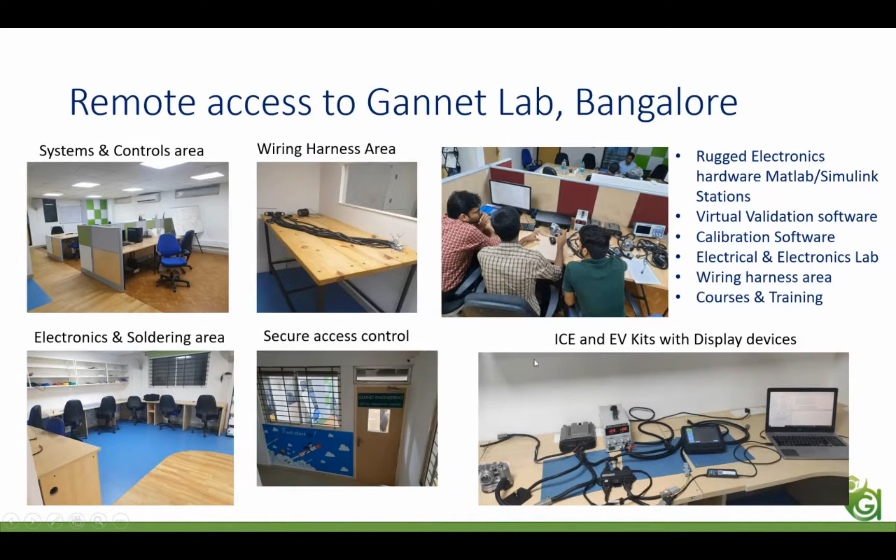This is just one of the EV kits and IC kits which we have. Coming to the list of different ECUs we have, this is just an example, but we have many more ECUs than this. These are the range of display units, and again these are not the only display units, we have a range of display units.

This is an example of what we showed earlier. This ECU is normally an 8-cylinder gasoline ECU, and this is a 7-inch touchscreen display unit.

Some of the courses come with remote access to the labs. What you saw earlier, the Gannet lab, you will have access to the development kits connected to those computers, which will have all the software needed to do your own development. So we see more traction from startups and students to learn hands-on on these real development kits using MATLAB and Raptor.

Once you connect to these computers in the remote lab, you can do your development and then flash the ECU and see how it works. Of course, Gannet will help you connect to the right hardware and make the wiring harnesses to connect to those systems.

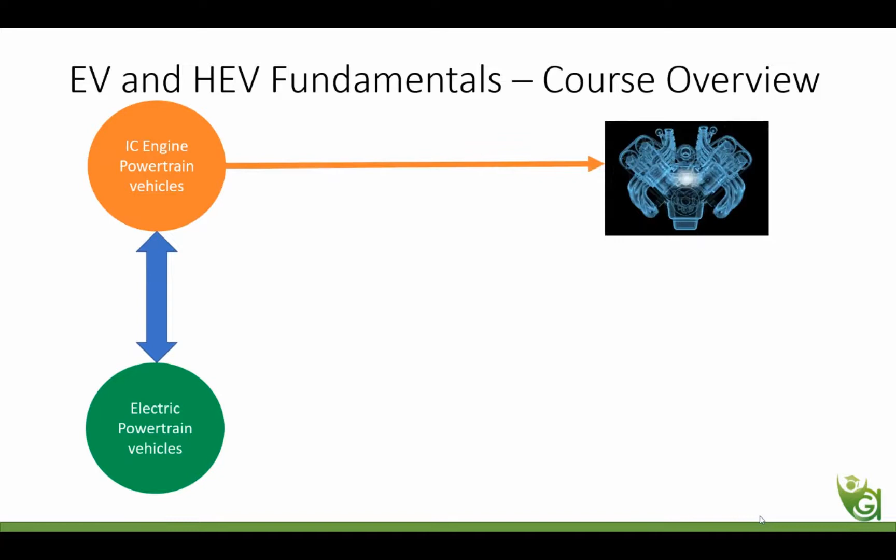Coming to the course overview part, this course focuses on IC engine powertrain vehicles which are converted to electric powertrain vehicles. So you have an IC engine vehicle and an electric motor, where the IC engine is being replaced by the electric motor, or the electric motor is augmenting the IC engine. Here we will understand the multiple configurations feasible for doing these options, either going for IC engine to EV or IC engine to HEV, and what different configurations are feasible.

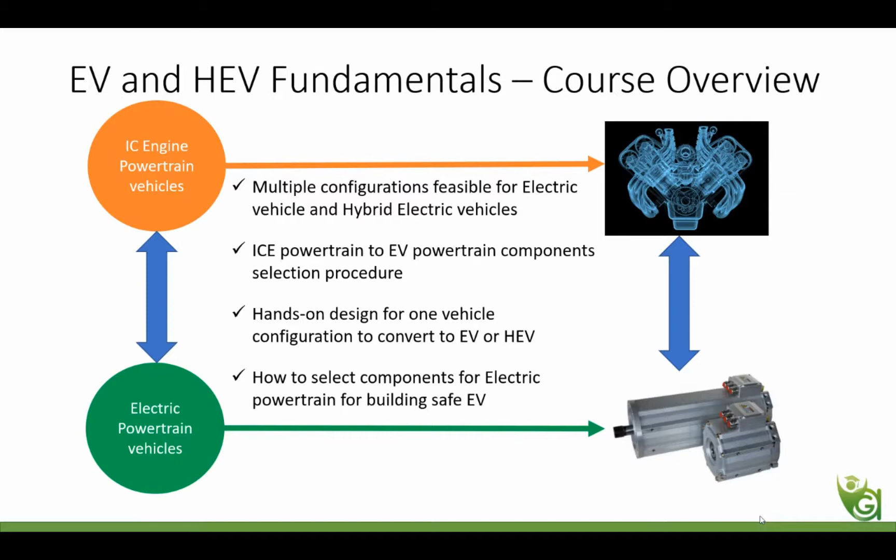Then the IC powertrain to EV powertrain component selection procedure. Before going to the component selection procedure, you will understand each component, why it is so important, and what factors to select it. Finally, you will have a hands-on design for one vehicle configuration, which can be a passenger car or heavy duty depending on the exercise. You will get the option to do one hands-on design for one vehicle configuration to convert to electric vehicle or hybrid electric vehicle, and understand how to select components for the EV powertrain to build a safe EV.

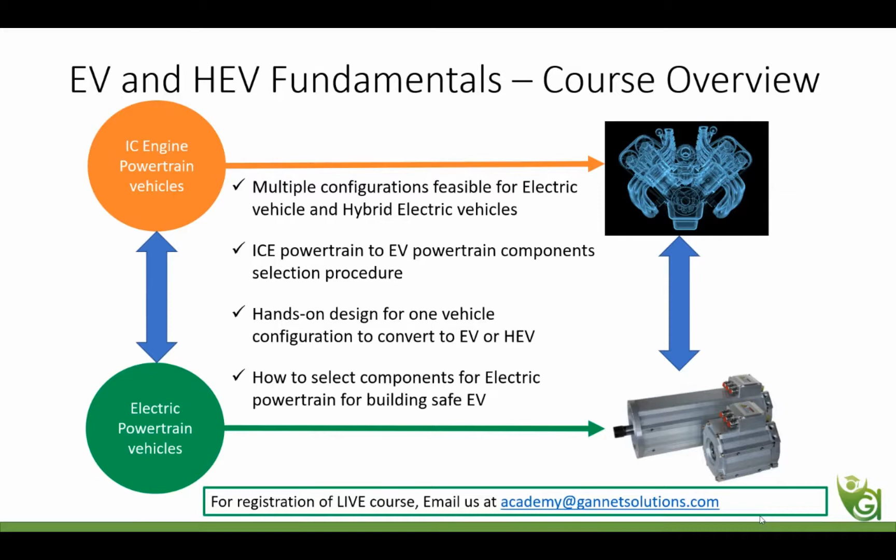This course is totally 10 hours, available in both self-paced and instructor live program. For the instructor live program, it's a weekday program with sessions from 7 to 9 p.m. Indian Standard Time. I'll also show you the schedule at the end.

Don't worry if someone is interested in self-paced courses. You might have a question about how to connect with the trainer or get your questions answered. For these things, you'll have an email connect with the trainer for questions. Anytime you can send me the email; as I am the trainer for these courses, you can send me the email directly, or to academy@gannecsolutions.com, and your questions will be answered. You will also have one monthly session for 1 hour where all your questions can be taken up and answered for self-paced courses.

To know about this particular course: this course is developed to help understand the basics of EV and HEV, as the current trend is towards electrification of IC engine powertrain to EV or HEV. This course provides a methodology to select the right layout and right components for electrification.

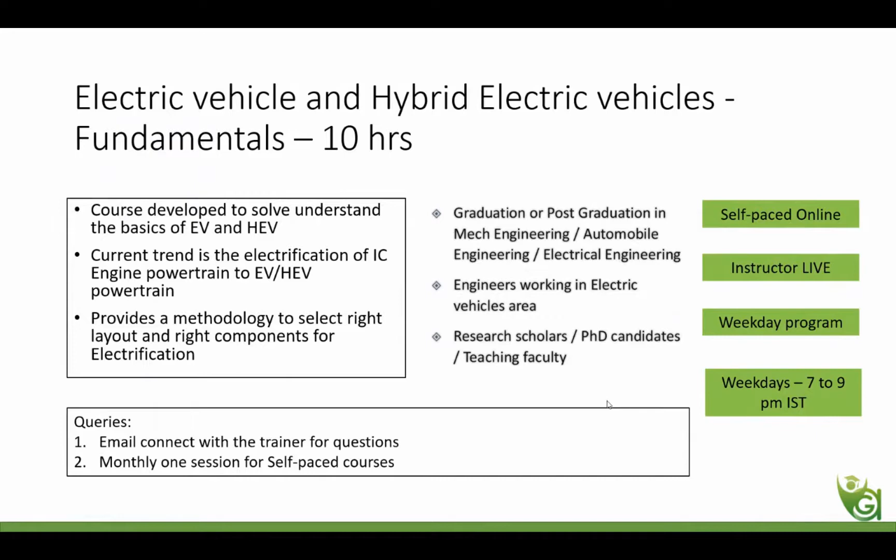So the students, as well as the people working in the electric areas, or the startups working in the electric areas, and the research scholars, the PhD candidates, teaching faculty, everyone, they are eligible for this particular course.

So let's go to the technical topic, which is electrification of IC engine vehicles.

Coming to the electrification of IC engine vehicles, first we need to understand what are the challenges that IC engines are facing today. So I request a poll now. Let's see what you feel are the IC engine challenges right now, which are mainly focusing on the move to electrification.

Thanks for the vote. So I can see 83% or 81% of people have voted saying emissions is the main problem, and fuel efficiency is the second option, which is 60%. And faster response is 30%, vehicle weight is 30%. So thanks for all your valuable votes. I can see emissions being a major factor.

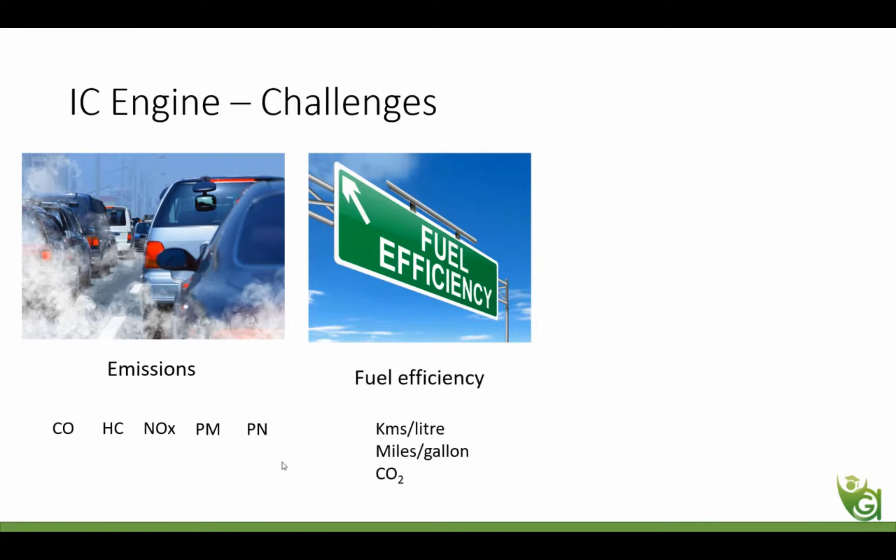The second challenge which IC engines are facing today is fuel efficiency, which is measured in terms of kilometers per liter or miles per gallon or CO2 norms. And the third challenge right now IC engines are facing is response, which is measured in terms of achieving faster speeds in less time.

Coming to the options we talked about, what are the IC engine challenges where electric motors are taking advantages? I see all these three are the important factors where IC engines are having bigger challenges and electric motors are taking more advantage.

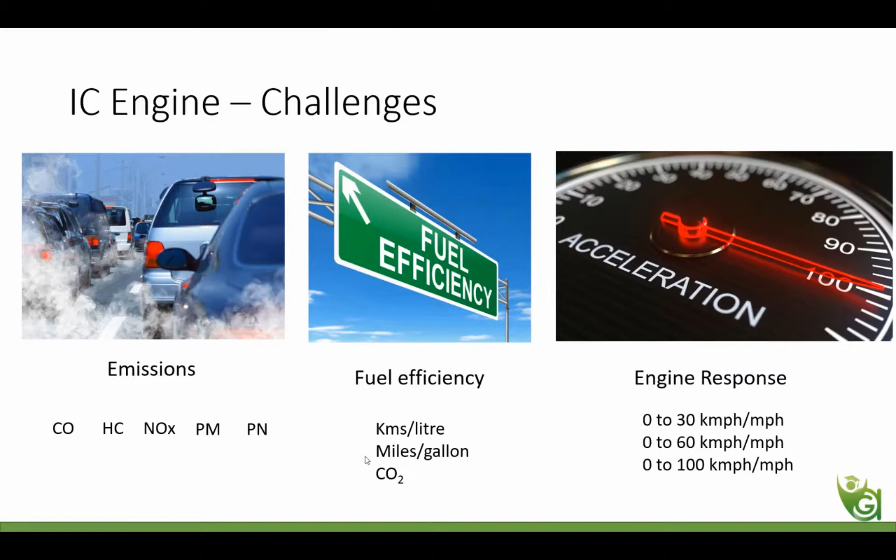So coming to this, we just need to understand a little bit more about IC engine combustion, because when we are trying to go from IC engine vehicles to EV or HEV vehicles, we also need to understand what we are trying to replace or append to the complete system. So for this, we need to understand what is IC engine combustion.

An IC engine is a system where fuel mixes with oxygen and produces high temperature and high pressure. And these high pressure gases' energy pushes the mechanical components, producing mechanical power from the IC engine.

Ideally, the fuel and oxygen in the air have to mix with each other in the IC engine combustion chamber, and it has to produce high pressure, high temperature, and CO2 and H2O. It was not supposed to produce all the other emissions which we talked about - that's the ideal scenario. But in the real scenario, it's producing other than CO2 and H2O, which are hydrocarbons, CO, NOx, PM, and PN.

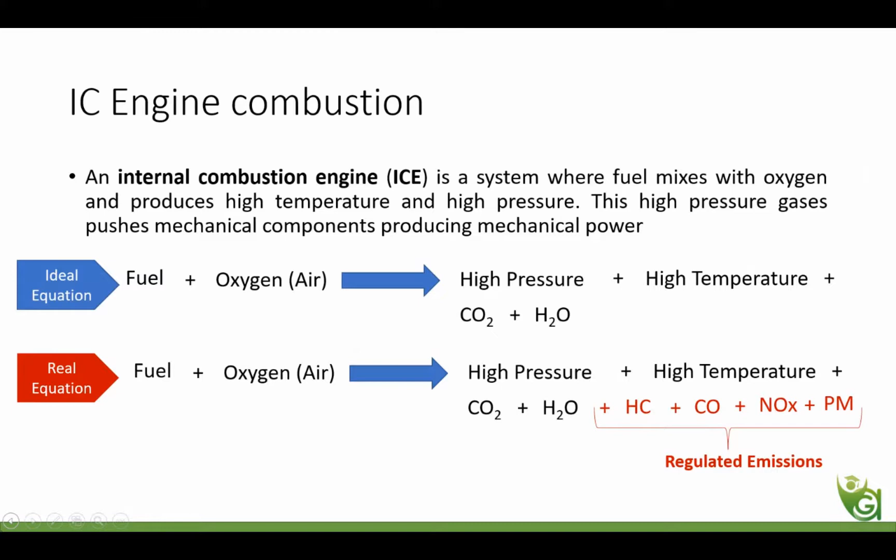Out of these particular emissions, currently these are the regulated emissions. That's the reason why I am putting only these particular emissions here, but there are many unregulated emissions. So this process of producing mechanical power from fuel is called combustion. Whatever emissions we're talking about, it's the combustion emissions which we are trying to focus on - these are the regulated emissions and there are many unregulated emissions.

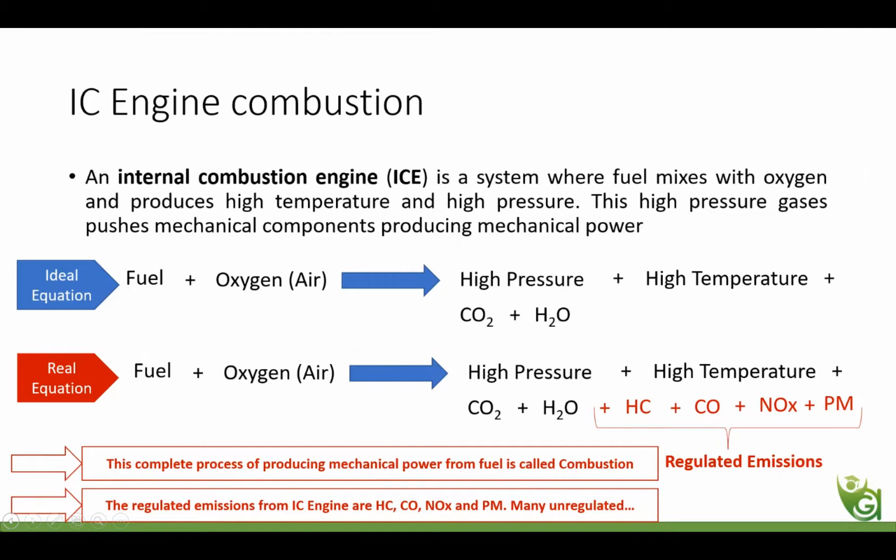Now, when we are planning to shift from ICE to EV or HEV, assume the first case like you are trying to move from ICE to electric vehicles. Now we are going to replace this IC engine in the vehicle and incorporate an electric motor. When we try to do that, what are the different aspects that need to be taken care of from a vehicle performance point of view? So we need to understand what the IC engine is right now providing.

So we'll discuss IC engine power and torque. When we hear IC engine specifications, the power and torque are the two things always highlighted. So what is power and what is torque?

Have a look at these pictures and it will clarify your questions easily. So power can be represented by a horse, and torque is represented by an elephant. So when you need more power - more power is needed to pull loads, at running condition, to move fast.

Assume you're already driving at 100 kmph. If you want to drive faster, then you need more power. More torque is needed to pull loads from static condition to low speeds. So assume you have a bunch of load to carry and move instantly, then you need more torque. Assume you are driving uphill, your car doesn't need more power, but it needs more torque to move at low speeds. So power and torque are very important for defining vehicle performance.

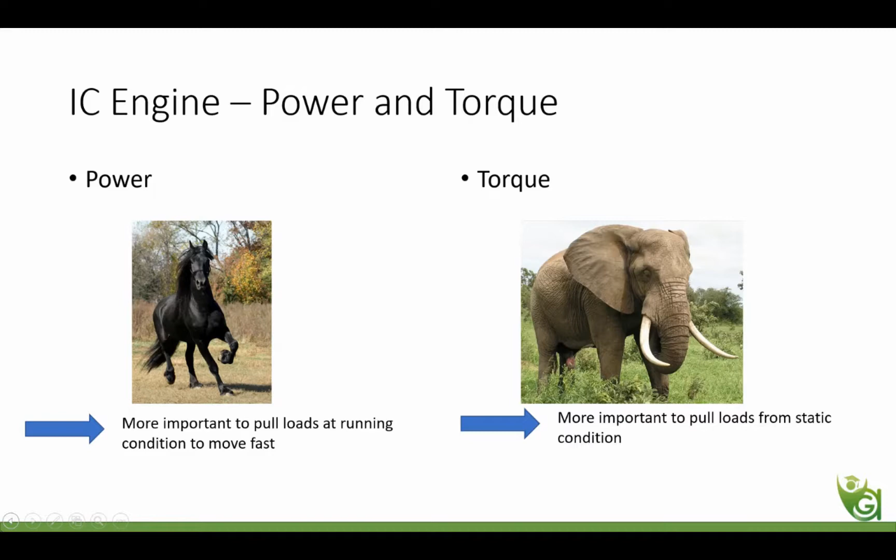Now we will see how performance curves of an engine look with respect to engine power and engine torque. As I mentioned, while we are trying to replace this IC engine with an electric vehicle, what kind of performance are we going to put into the vehicle? For that reason, we need to understand what power and torque are, how the power curves for an IC engine look, and how we have to look at the EV part as well.

Coming to the IC engine power curves, as I mentioned, power and torque are very important for defining vehicle performance. Have a look at this sample performance curve, which is for one diesel engine, having a maximum torque of 450 Newton meter. Here the primary axis is engine speed, the secondary axis is torque, and the other secondary axis is power. The blue line indicates torque, and the red line indicates power. This is how typical performance curves look.

This particular engine shows a flat maximum torque from say 1600 rpm to 2400 rpm. It can look like a single top curve, like a bell curve. You need to understand what this power curve means. You can see this is the maximum power point of this engine, and this is the maximum torque. At low speeds, this torque curve is the important factor which helps you take more load, and this is the particular factor which helps you achieve more speed.

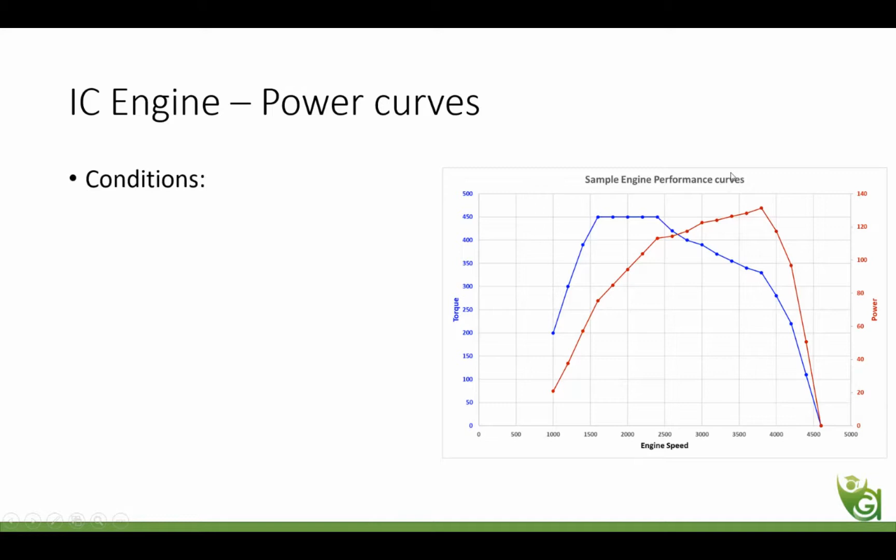So when we look at different conditions, at gradient conditions for all vehicles, you need more torque. If you are trying to operate that particular vehicle most of the time in gradient conditions, then the vehicle which we are going to convert to EV should provide more torque than more power.

Coming to heavy duty and off-highway vehicles, more torque is preferred because heavy duty vehicles carry more load. Take an example of a bus - it carries more people and load, and it has to move up the hill. It's too much load and it has to move up the gradient, so it needs more torque than it needs more speed.

Even for off-highway vehicles like a road roller or construction equipment, they work at only one point, pulling more load and doing things, so you need more torque for those kinds of applications. For on-highway vehicles, like I talked about, even a bus needs both because it has to work in both conditions - on the highway as well as in the gradient.

Coming to idle speed - this is what the terms you need to understand from the IC engine, and then when you're trying to understand the electric vehicle, electric motor. Since you're going to substitute this with the IC engine, you need to understand the different terms and terminologies of the IC engine. The other one is idle speed - idle speed is the engine speed at which the power is zero.

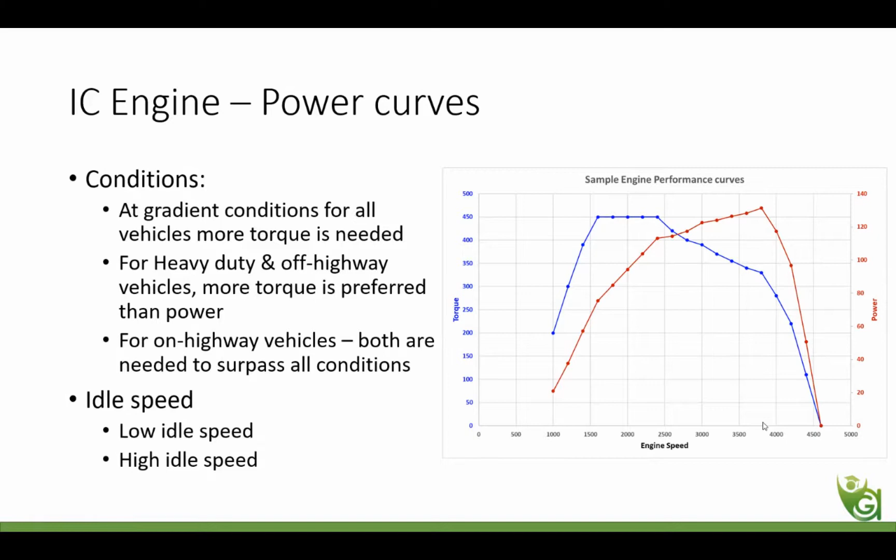In a normal IC engine vehicle, output power or torque are measured at the flywheel of the engine. This is the engine and the flywheel connected to it. The power and torque are measured with respect to the performance curves we talked about earlier, coming at the end of the flywheel. Then most engines are connected to transmissions with a number of gears, which connect to the drive shaft, then to a rear or front axle, and finally to the wheels. So this is the normal power distribution, how it happens.

This is the power at the engine, then it will transfer to all the wheels.

Now take an example of a car. Which wheels are provided power in a passenger car? Which wheels of the vehicle will be provided power in a four-wheeler?

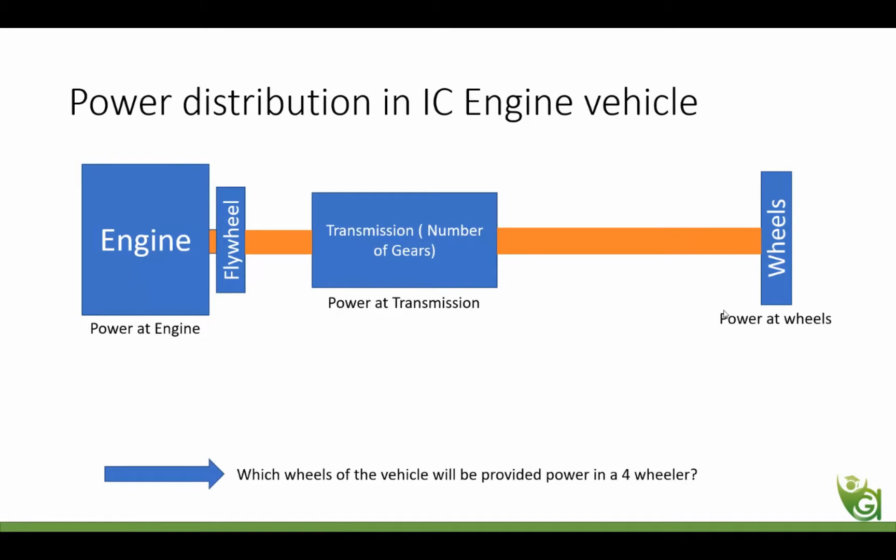If you look at many rear wheel drive vehicles, mostly SUVs and higher power vehicles will have rear wheel drive. Most passenger cars you see will mostly have front wheel drive configurations. So all passenger cars are mostly front wheel drive, and most SUVs, buses, everything will be rear wheel drive. But there are also some vehicles with the option to connect two wheel drive or four wheel drive. Two wheel drive means either of those two options, rear wheel or front wheel, and all wheel drive means connected to all four wheels. All wheel drive vehicles are very much needed when those vehicles are moving more on gradient conditions.

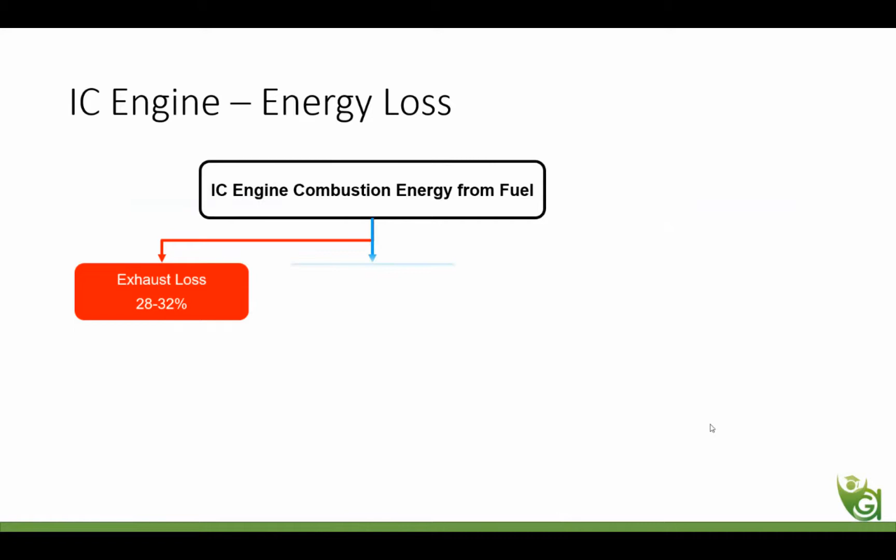Coming to the losses, the exhaust losses are close to 30% in an IC engine, and the coolant losses are again close to 30%. The remaining power is what we call indicated power, which is close to 40%. Out of this indicated power, the engine has to take care of its own systems like cooling and lubrication, and then take care of friction. Finally, the amount of power delivered to the wheels is close to 30%. With improvement of new technologies, this brake power can increase a little bit more, but it's not going to even reach 50% in the coming years. This is how the energy losses happen with IC engines, so the power delivered to the transmission is this brake power, which is 30%.

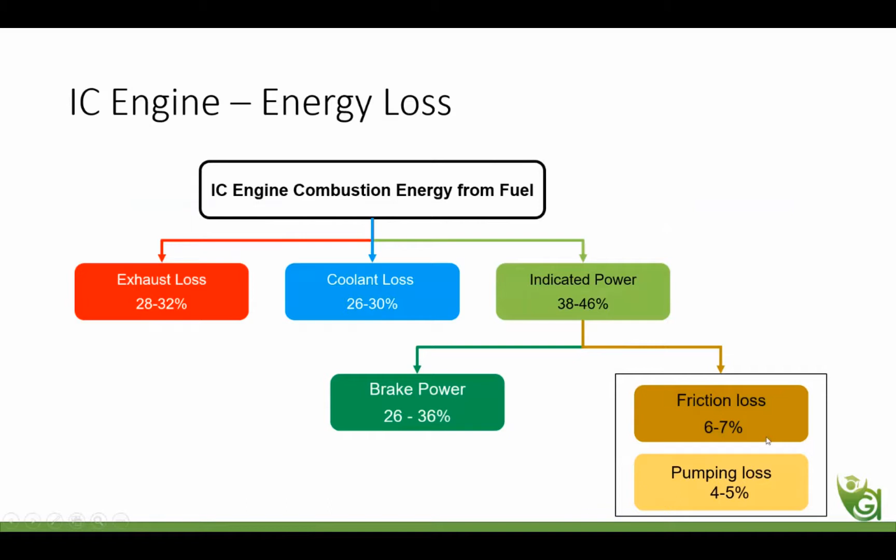So now coming to electric motor, as we said, we are going to replace the IC engine with motor, right? Let's see the electric motor performance curves, as well as what are the losses in electric motor. Is it the right thing to replace it or not?

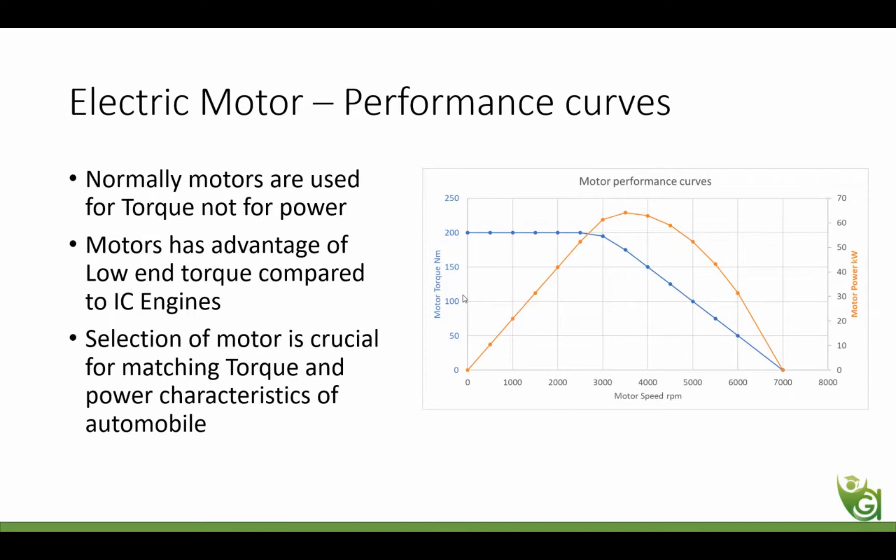So now coming to energy losses of electric motors. The losses on electric motor are more focused on spinning losses and thermal losses. Spinning losses also include iron losses and copper losses. Then you have thermal losses, and finally the brake power which we are going to provide to the particular transmission. Assume the same IC engine vehicle is replaced by electric motor.

So it is connected to the transmission and to the wheels. You're going to have 90 to 95% of power - say 90% is what you're trying to get through electric motors. When we compare, this makes it more helpful to see, yeah, there are less losses in electric motor.

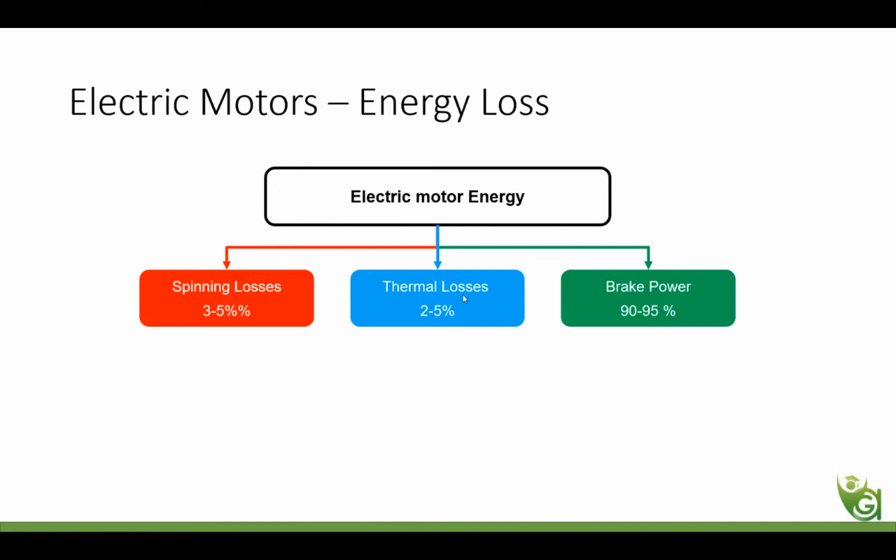But again, electric motor needs electric power, which has to be derived from some other source. So here I'm not talking about the losses incurred for generating the electric energy and using the electric energy. Here I'm talking about electric motor using the electric energy and providing the power.

So the brake power is what we are trying to get from this particular electric motor to the rest of the powertrain. In this case, when we're trying to connect it to transmission, this 90 to 95% is what the transmissions are going to receive.

So from this comparison, it is very evident that the energy efficiency from IC engine is very low compared to the energy efficiency of electric motor. So for providing the same amount of power and torque, the electric motors are very compact. You don't need a higher same size of engine, but a more compact electric motor to replace this particular IC engine.

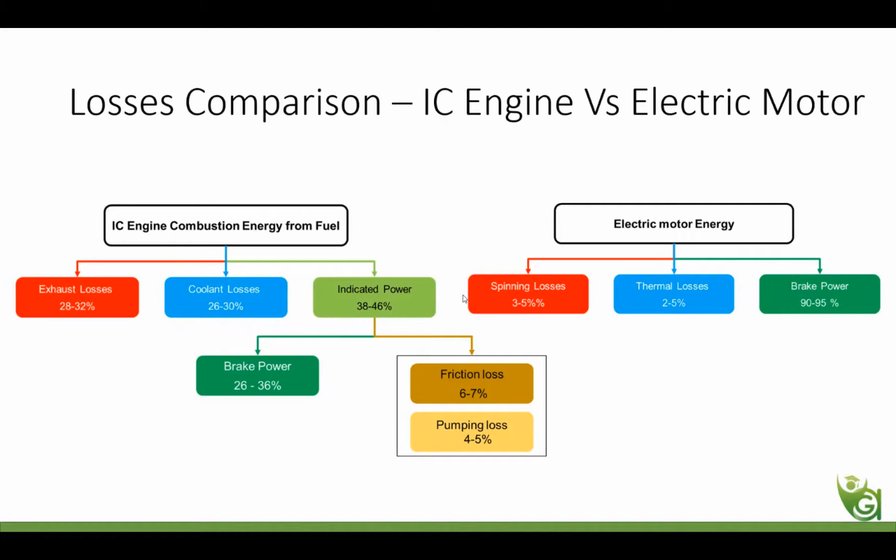So let's have a look at the power distribution also from electric powertrain. As you saw earlier, now we are going to replace that particular IC engine which is there in the layout with electric motor.

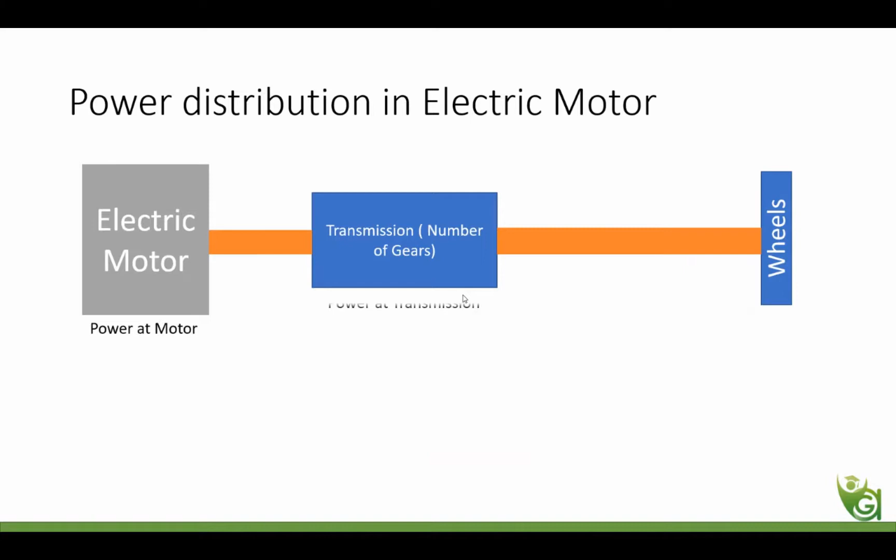So now again, same case - which wheel will be provided? It remains the same case like how you have it in earlier four-wheeler vehicles. It can be given to rear axle, front wheel axle, or all-wheel drive.

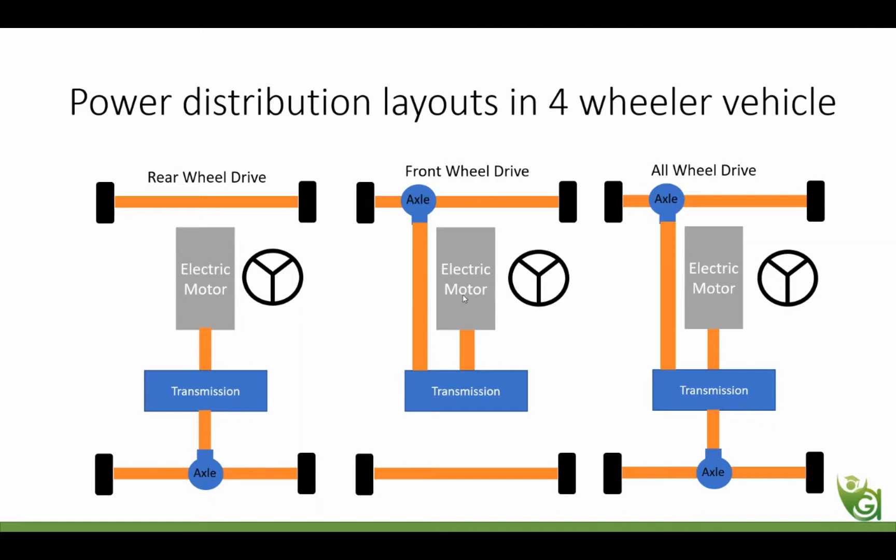Now, the replacement of IC engine with electric motor. So what are the things which electric motor has to match so that it can replace the IC engine easily? The first thing is electric motor speed range should be very similar to engine speed range, if you are not going to change many other things.

If you're just, as earlier you saw it, right? Transmission remains same, wheels remain same, everything remains same. You are changing only electric motor - you're just putting electric motor in place of IC engine. Then the speed range also should match, and the motor torque and power should be matching to the similar engine torque at those particular speeds. Then it's like a like-to-like replacement.

Getting a like-to-like replacement is really going to take a lot of time in selecting the right motor. Many times you won't be having the option to have a right motor with a similar speed range, torque range, and power range. So now let's have a look at some real examples of IC engine vehicle and electric motors.

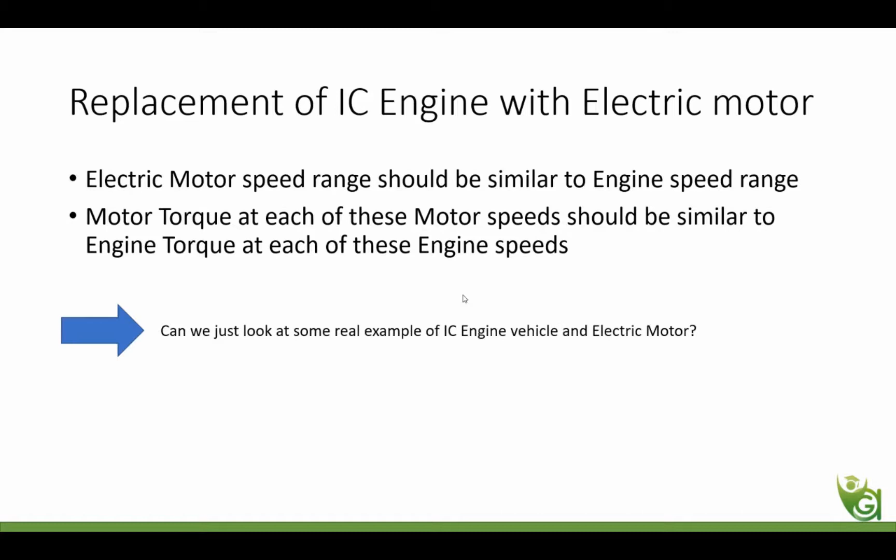So let's take an IC engine gasoline car. I'm just taking a Honda City as an example, because I just want to take an option which has both gasoline engine and diesel engine. Till now we talked about IC engine - we didn't mention what kind of engine, right? We talked about only IC engine. I'll come to the point why I'm talking about a different fuel type of IC engine.

So let's say one car is powered with gasoline fuel, and this particular vehicle has performance specifications like the weight - it has curb weight, which is 1107 to 1153 kgs. It depends upon the accessories and other things.

The dimensions of the vehicle remain the same with respect to gasoline and diesel. The maximum speed of this particular vehicle is 170 to 180 kmph. And the acceleration time, so we talk about response, efficiency, emissions, right? 0 to 100 kmph is the response here, 10.2 seconds. And the engine giving power and torque is a 1498 cc, 4-cylinder engine, giving close to 120 horsepower at this RPM and 145 Nm torque at 4300 RPM.

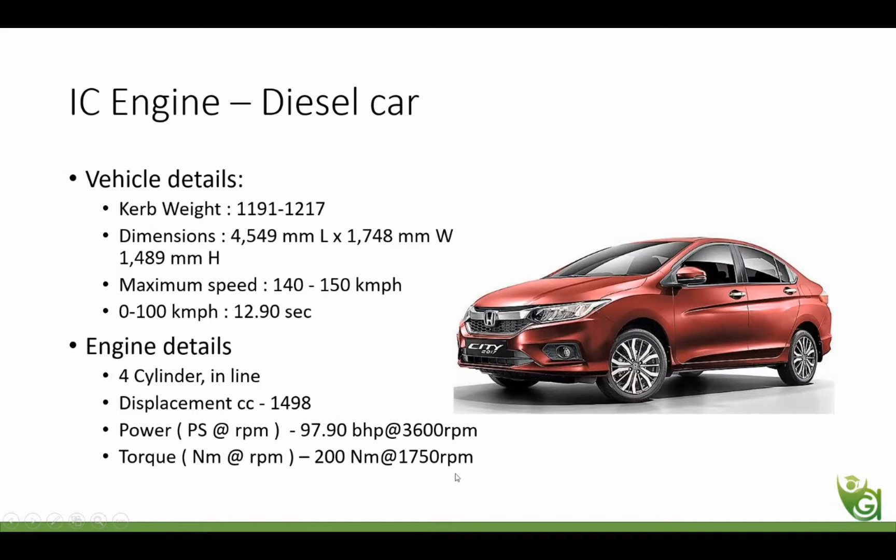Now, when we are trying to replace this particular car with an electric motor, how do we select the motor for this particular different IC engine combination? You want to match this speed range or this speed range, you want to match this torque or this torque, you want to achieve this particular speed at this particular speed. What are we trying to match? So how to select the right electric motor and transmission?

If you look at this particular vehicle, it has a manual transmission, automatic transmission also. Now, which engine and which transmission do I have to select for this particular vehicle? Earlier we talked about only engine to electric motor, but now in this condition, which one to choose? Do you want to match gasoline performance or diesel performance? Because when we have one EV for that particular car, it can replace both engines, so which performance specifications do we achieve when doing this exercise?

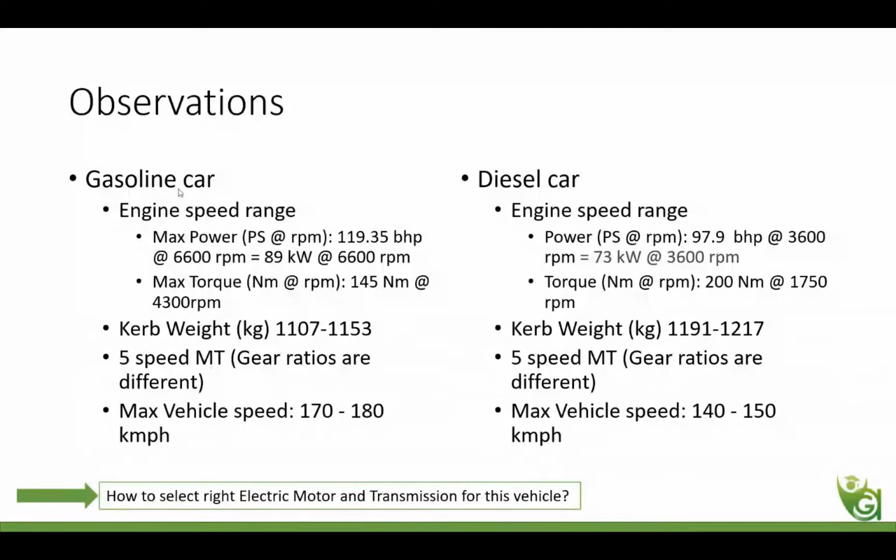So what did we learn till now? In IC engine powertrain, the engine plus transmission has to be replaced by EV powertrain, which is motor plus transmission. And the EV powertrain component selection is very crucial for achieving this vehicle performance.

I have a question here: can we have more than one powertrain in the vehicle? So assume when we're talking about powertrain, I mentioned about IC engine powertrain, which is engine plus transmission. So you have a diesel engine plus transmission, gas engine plus transmission. Can we have both together? Can we have more than one powertrain in the vehicle? So I request you to answer the poll: can we have more than one powertrain in the vehicle? Yes or no.

So, can we have more than one powertrain in the vehicle? I can see like 70% said yes, it is possible to have more than one powertrain, and 23% said it's not possible to have more than one powertrain.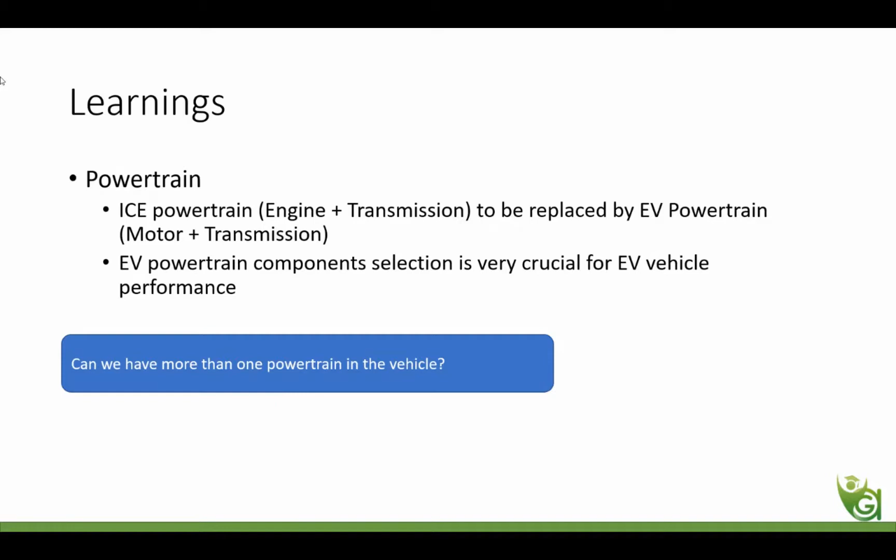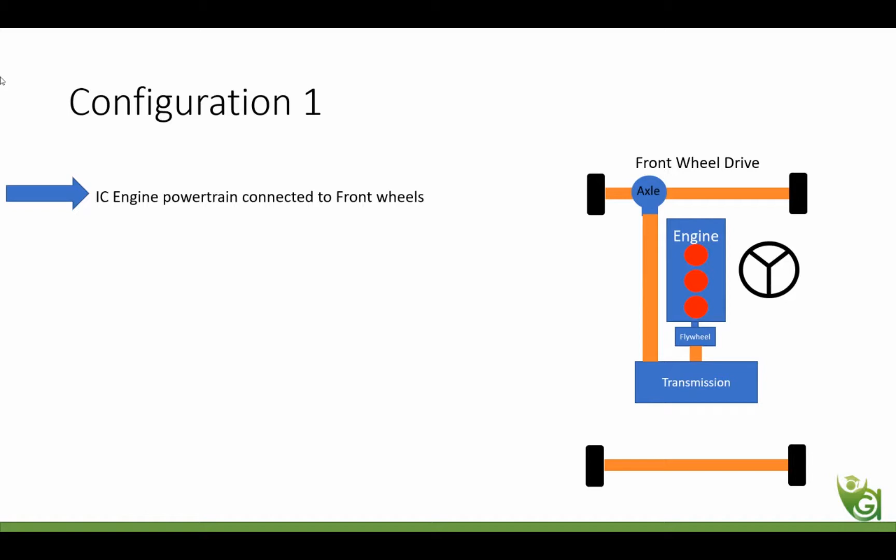I'll say yes, it's possible to have more than one powertrain, but let's look at a configuration where we'll have more than one powertrain. In this configuration, what we are seeing is a front wheel drive configuration, of course with an IC engine. So in this particular configuration, can we have rear wheels which are not powered as of now? Can we have the rear wheels connected to the electric powertrain? Can we add an electric motor and transmission to the rear wheel? Assume now we are going to have some different conditions of working.

Assume the IC engine is going to work in some conditions. Say whenever the vehicle needs more than 60 kmph, I want the IC engine to drive the wheels. Under 60 kmph, let the electric motor run it — I'm just taking an example. So can we have the rear wheels connected to an electric motor powertrain and work in different modes? So, can we have more than one powertrain in the vehicle? Yes, we can have.

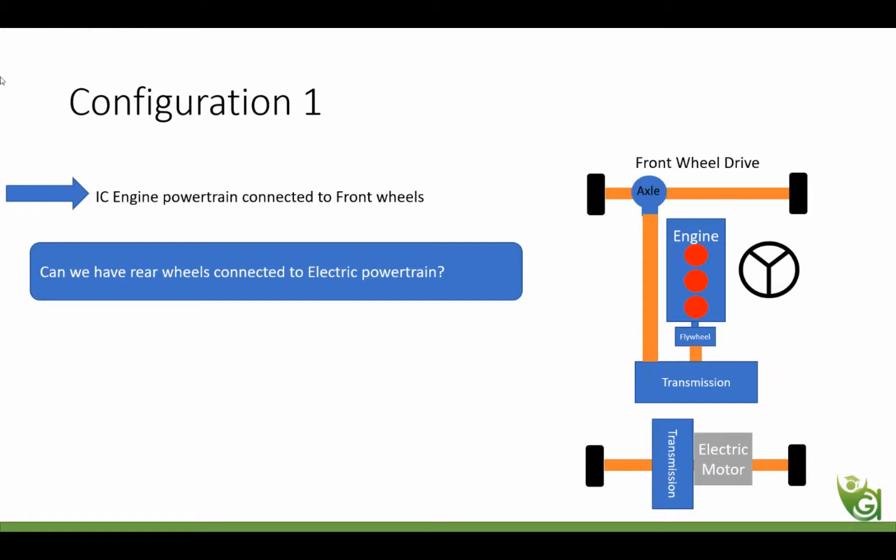So vehicles with multiple powertrains are normally called hybrid vehicles. It doesn't mean it needs to be only electric motor — you can have a gasoline engine powering the front wheels and a diesel engine powering the rear wheels. Hybrid vehicles means multiple powertrains are available in the vehicle layout, where different fuels are powering different parts. When we talk about an electric motor as one of the powertrains, we call it a hybrid electric vehicle. So in a vehicle with multiple powertrains, when one of them is an electric powertrain, they call it a hybrid electric vehicle. That's it, so if you take an option like yeah, I want, or you might have seen another option.

Many early vehicles, before electric motors took more and more market share, used LPG kits and CNG kits. Even in Delhi today, there are more CNG vehicles. So obviously when you have an LPG kit, assume this particular vehicle has an LPG kit, but the LPG kit is not going to power the wheels directly. This engine, which was there earlier, assume it's a gasoline engine.

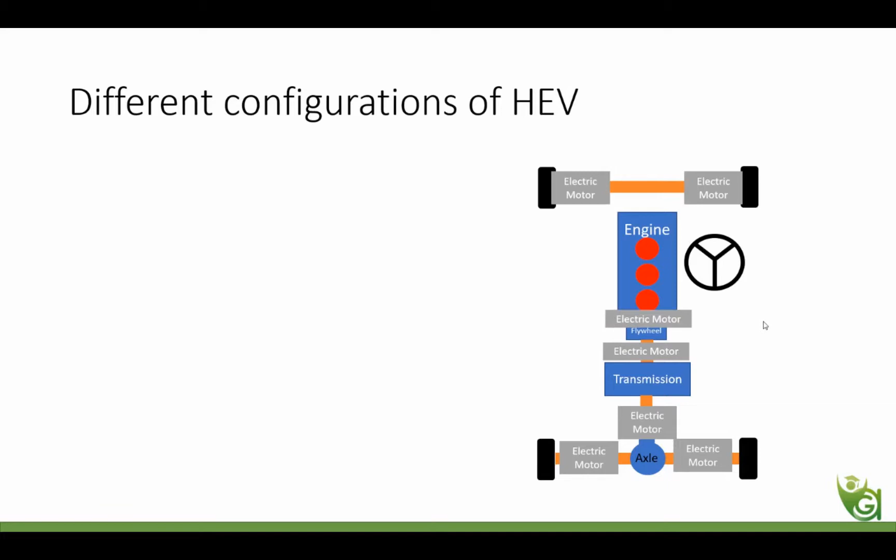Can I fit it between engine and transmission? Can I fit it between engine and the flywheel? Or can I fit it in the front end of the engine? Front end of the engine. So you can see all these options are feasible to install an electric motor now.

Okay, so technically when we talk about the motor installed at the front end accessories drive, we call it a FEAD belt. Front end accessories drive is called P0 configuration. So when you see any vehicle that says we have a P0 motor, you should understand that particular vehicle has an IC engine powering the wheels. It can be front wheel drive, rear wheel drive, or all wheel drive. And it also has an electric motor on the front end side of the engine.

If the motor is placed in between the IC engine and the flywheel, this configuration is called P1. If the motor is placed between the engine and transmission, it's called P2 configuration. Similarly, between transmission and axle, it's P3, and on the wheels, it's P4. Hope you understood now what is P0, P1, P2, P3, P4. It depends mostly on the location of the electric motor in the vehicle. So different HEV configurations we call P0, P1, P2, P3, P4.

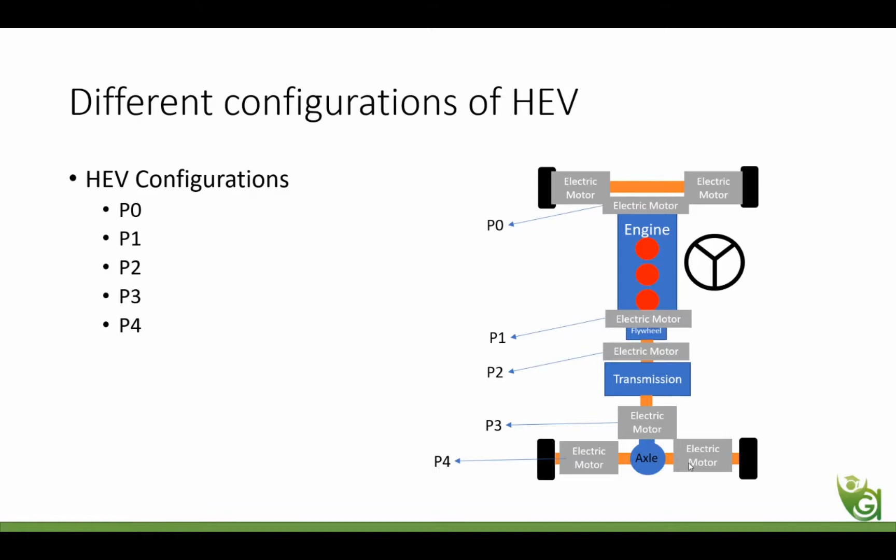Okay, I have a crazy question here. Can we have all the above configurations in a single vehicle? So if you count, let's see how many motors are here. 1, 2, 3, 4, 5, 6, 7, 8. 8 motors and 1 engine powering the wheels. So can we have all the above configurations in a single vehicle?

What do you think? So the possibility is yes, it is possible to fit all the motors in a single vehicle, but it's not economically viable. And now you have to control even the vehicle, deciding which motor or which engine in which condition is driving the wheels. It's possible, but economically it's not a viable option. Controlling this IC engine and motor together is going to be very, very complex. But as a research topic, it's always possible to explore different ways of controlling and working together.

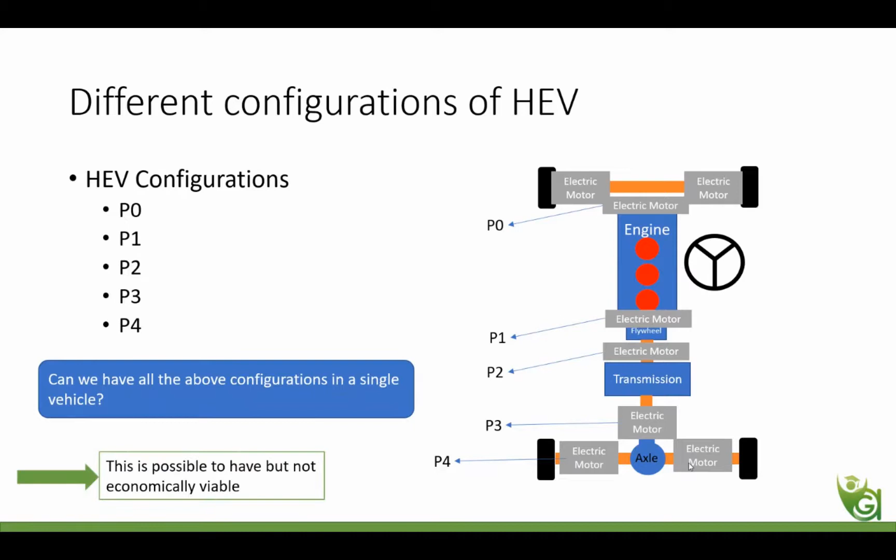So let's stop for some questions now. There is a question asking for examples of bi-fuel vehicles. I request that if anyone has questions, put them in the Q&A place, wherein I can answer your questions during the session, anytime. You can put the questions so that when I have a Q&A session, I'll answer all your questions.

Coming to the question about examples for bi-fuel vehicles, you can see these particular vehicles which are CNG fitted, LPG fitment from the manufacturer. Most of the vehicles right now are S-CNG fitted vehicles. So all these vehicles come as bi-fuel vehicles, wherein you can have the possibility of using petrol or CNG. Today in India many vehicles in production are available with a petrol plus CNG option, wherein you can use any of the fuel at any time.

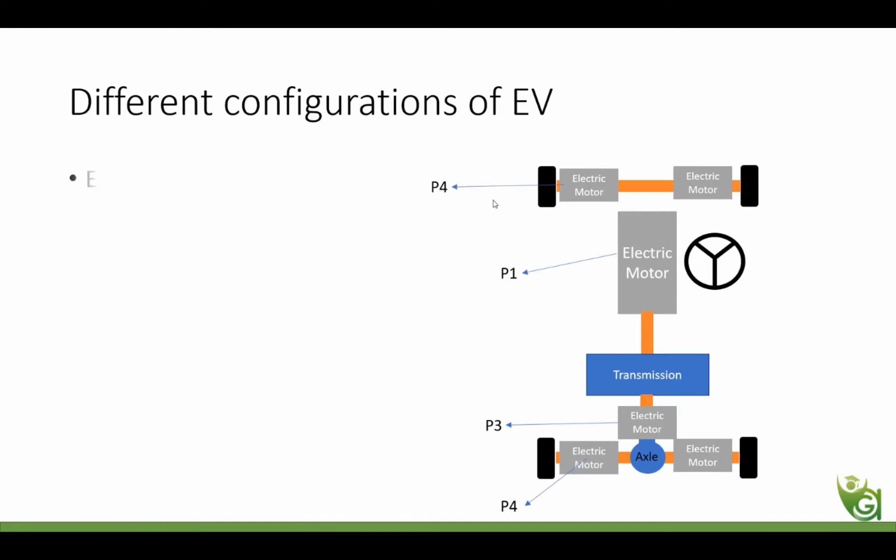So with this, the configurations come up as either powering two front wheels or two rear wheels. Even taking it this way, you will have totally 5 combinations. But again, you may want one P4, two P4, or three P4, so all those things will increase the count. Like P3 on the front axle, since we talked about rear wheel drive here. When we have all wheel drive vehicles with an electric motor in one axle and another in the other axle, the number of configurations keeps increasing.

So HEV, the way I jotted it down, had 31 combinations, but we can achieve more than 31 also. And EV has 5 combinations, but we can achieve more than 5. So this is all about understanding different configurations of EV and HEV.